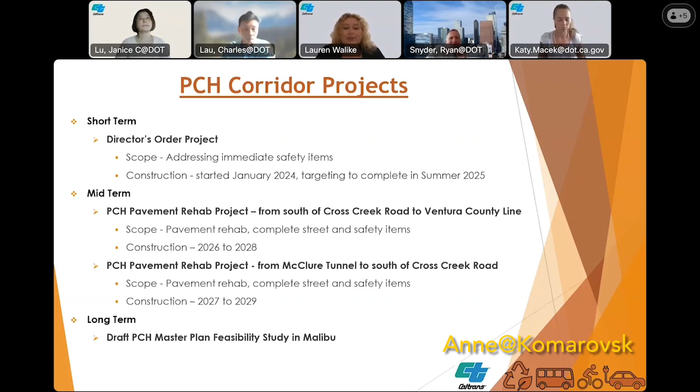You're on mute, Janice. Thank you for letting me know that. Hi, good afternoon, everyone, my name is Janice Lu.

I'm the project manager for these two pavement rehab projects. Along with me, my colleague Refugio, the design manager, will be helping me present the scope of work as well. I'm going to dive right in.

The first project is the north segment. This is about a 16-mile stretch on PCH, going from the south end of Cross Creek Road to the north end at the Ventura County line. Everything is within the city of Malibu.

The main purpose of this project is to fix the roadway. This will extend the service life of the roadway and improve the ride quality, and also minimize maintenance work, which will minimize maintenance worker exposure. We also understand that there's a lot of safety concern on PCH, so we're also incorporating and upgrading complete street features and safety features.

Next, I'm going to hand it over to Refugio to discuss the proposed scope of work. Yes, good afternoon everyone. I'm going to go over the bullet points and the proposed scope of work for this project. The pavement rehabilitation consists of cold plane and overlay with rubberized hot mix asphalt.

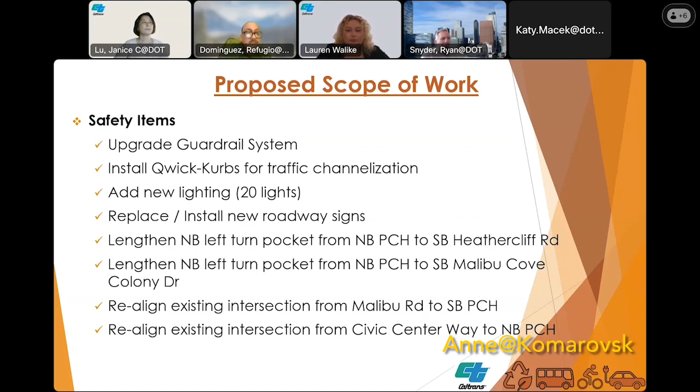Next slide. We have some challenges regarding the bike lane analysis. We would like to have bike lanes, class 2, from beginning to end, continuous.

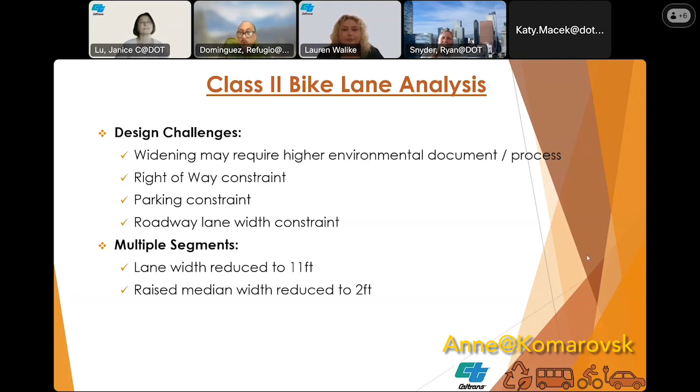Regarding bike lane analysis, where we are putting bike lanes, we'll be reducing the lane width from the typical 12 to 11-foot lanes. And the raised median at particular locations, we'll be reducing from 12-foot to 2-foot median.

And the class 2 bike lane, as we can see on the exhibit, there are 22 segments going southbound, 22 segments going northbound throughout the project limits. Going northbound, there's going to be 7.7 miles of new class 2 bike lane. And coming southbound, 7.1 miles of new class 2 bike lane.

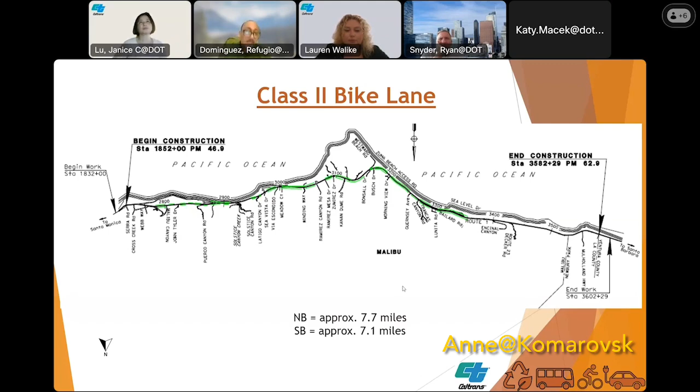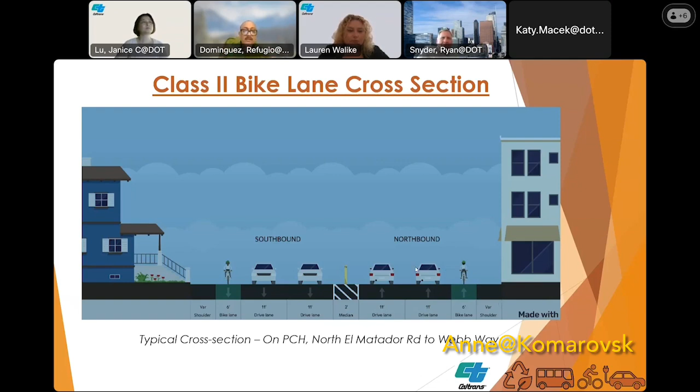Next slide. This is a typical bike lane cross section throughout PCH. From El Matador to Webb Way, which is most of the project limits, there will be a bike lane southbound and one going northbound, next to the existing shoulder. North of El Matador, we will not have bike lanes, only from El Matador to Webb Way.

Next slide. New sidewalks - we will have 6 new sidewalks. There are locations where we have dirt, or it's not really a sidewalk, where we will be adding new sidewalks. One is at Heathercliff, as you can see on the top left.

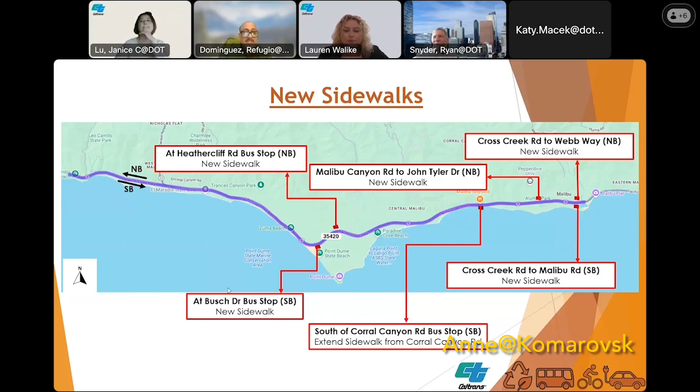There's a bus stop - we're going to be extending the existing sidewalk to a crosswalk so they can go south. Then at Malibu Canyon, between Malibu Canyon Road and John Tyler, then at Cross Creek Road to Webb Way. Then we will look at the southern portion at the bottom of the slide, from Cross Creek Road to Malibu Road going southbound. Then from Corral Canyon to a portion, to a bus stop. And at Busch Drive, there's a bus stop - we are adding also a piece of sidewalk.

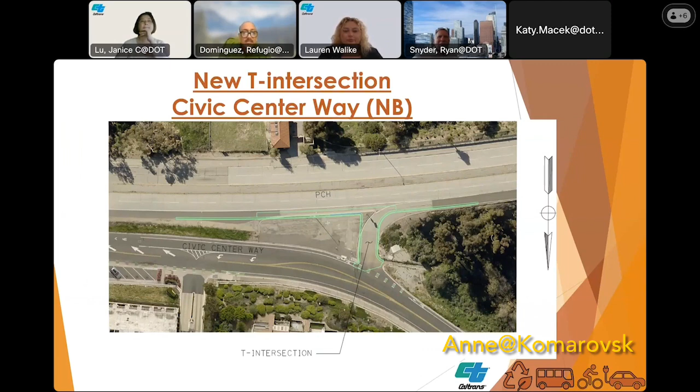Next slide. Regarding the 2 intersections I mentioned before, at Civic Center Way, we're adding a T intersection, 90 degree. This is the location where we're adding the T intersection, going northbound.

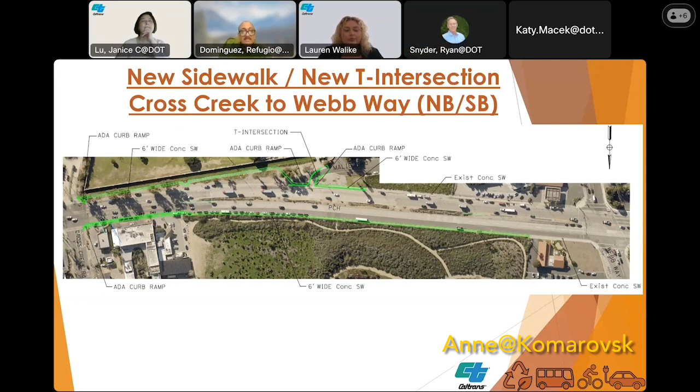Next slide. Coming southbound, a new intersection at Malibu Road - a T intersection, as you can see in green. We're also adding a sidewalk from Cross Creek to the new intersection, as you can see on top of the screen. And looking south from Cross Creek at the bottom, you can see a green line - that's a new sidewalk we're adding from there to Webb Way.

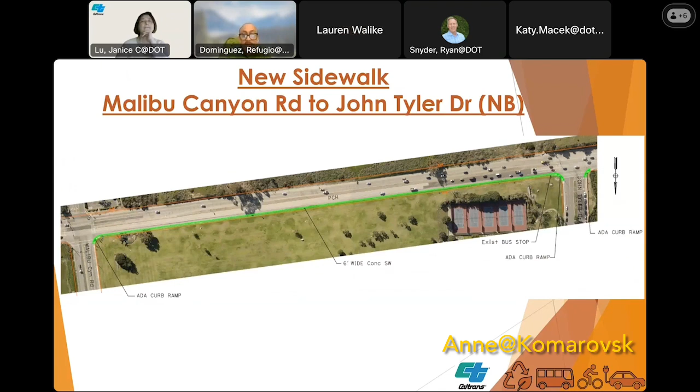Next slide. New continuous sidewalk going northbound between Malibu Canyon Road and John Tyler. I think Pepperdine owns that green area.

Next slide. New sidewalk south of Corral Canyon. This is going southbound from Corral Canyon up to a big stretch - I forgot exactly how many feet, but it's a continuous sidewalk that we will be adding.

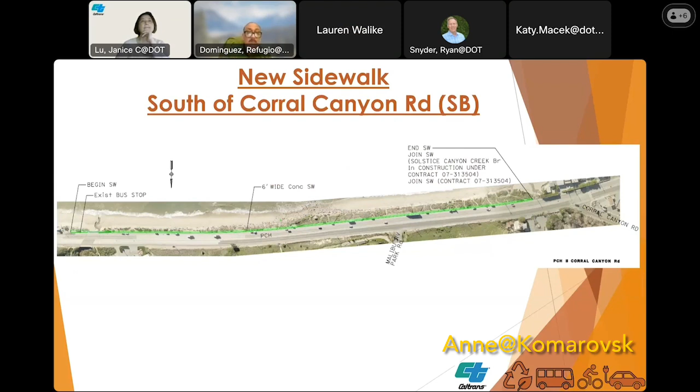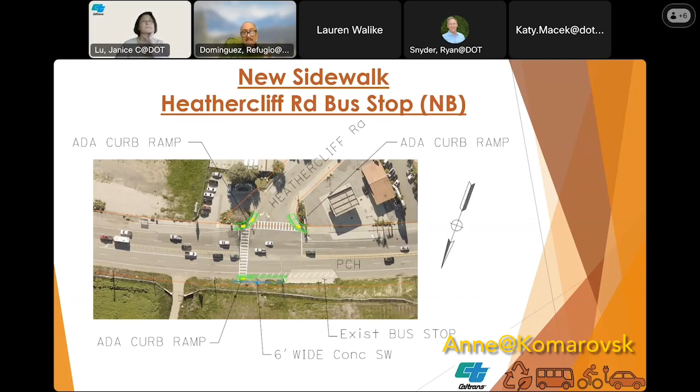Next slide. At Heathercliff, we have a bus stop going northbound. We're going to add a piece of sidewalk so persons can continue with a crosswalk, and then when they reach the light, they can use the crosswalk to cross and go to the other side on Heathercliff.

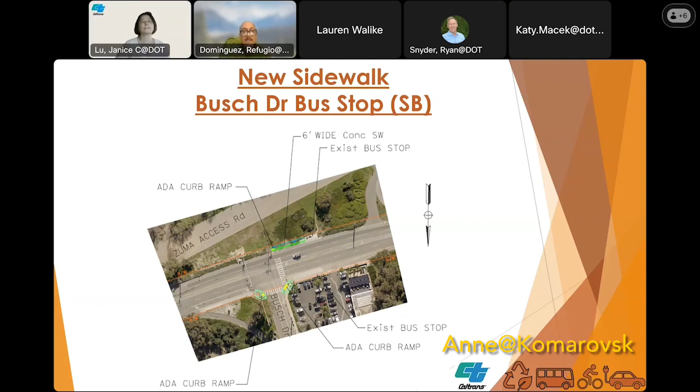Next slide. At Busch Drive, there is a bus stop but no sidewalk - just a little piece. We'll be extending the crosswalk so it's continuous, so the sidewalk will go to the crosswalk and the pedestrian can cross. Next slide.

Thank you, Virgil. So the project schedule, currently we're still in design phase. We're hoping to wrap it up maybe October in fall 2025. Construction will start approximately next year's summer, and hopefully we can finish it by summer or fall 2028. We understand there will be Olympics 2028, so we'll have a spec for no work during the summer months from June 1st to September 1st. At that time there will be no work or closure during that time.

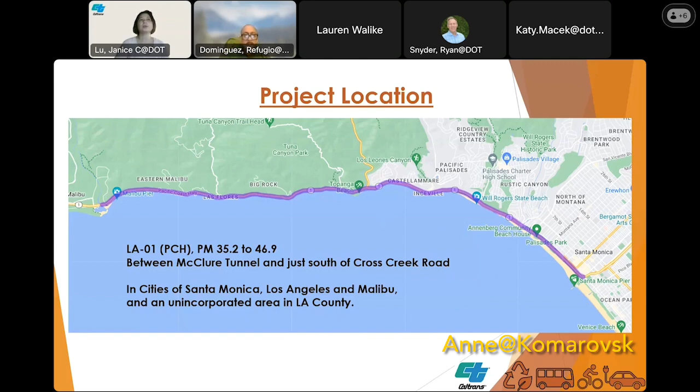I'm going to dive right into the south segment of the project. Project location for this one is about an 11.7 mile stretch on PCH, covering 4 cities. Starting from the south end, it goes from Santa Monica, then to the city of Los Angeles, then to the unincorporated area in Topanga, and finally to the city of Malibu. Post miles about 35.2 to 46.9, again from McClure Tunnel to Cross Creek Road.

Similar to the other project, the purpose of this project is to fix the roadway, extend the service life of the roadway, improve the ride quality, and minimize maintenance work and worker exposure. We'll also upgrade the complete street features and safety features.

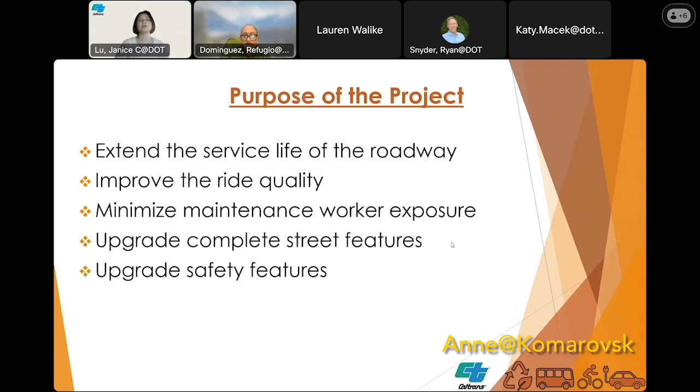I'm going to hand it back to you, Virgil. Yes, like Janice mentioned, the scope of this project is similar to the other project on the north side, but I'll go over the key points, which is cold plane and overlay with rubberized hot mixed asphalt. We're going to replace the structural section.

There are many locations where the pavement needs to be replaced, not just an overlay but replace the whole pavement at certain specific locations. We'll be doing that especially now that due to the fires, there's a lot of trucks doing improvements, doing excavation, hauling dirt from left to right, and the pavement is getting damaged. So for this project, we'll be replacing structural sections at those specific locations.

Also, there are 30 bus pads where we'll be replacing the pavement from asphalt to concrete, which lasts longer. Regarding complete street elements, we'll be upgrading 22 ADA curb ramps, adding 2 new sidewalks, 2 new crosswalks, and enhancing all the existing crosswalks. Since we're doing an overlay, everything will be restriped, brand new. And similar to the other project, we'll have pedestrian signals, countdown pedestrian signal heads, and bicycle detection.

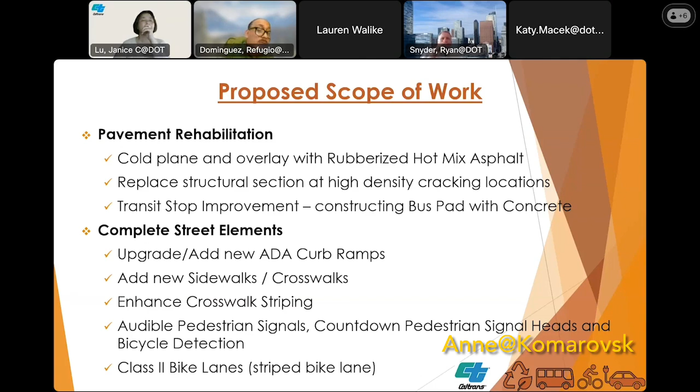And regarding the other project, we're also going to be adding class 2 bike lanes within the limits of this project.

Regarding safety items, we'll be upgrading the guardrail system. We'll also be installing Qwick-Kurbs for traffic channelization in the median. We'll be upgrading lighting at the 2 tunnels that we have, Roosevelt Tunnel and Beach Tunnel inside lighting.

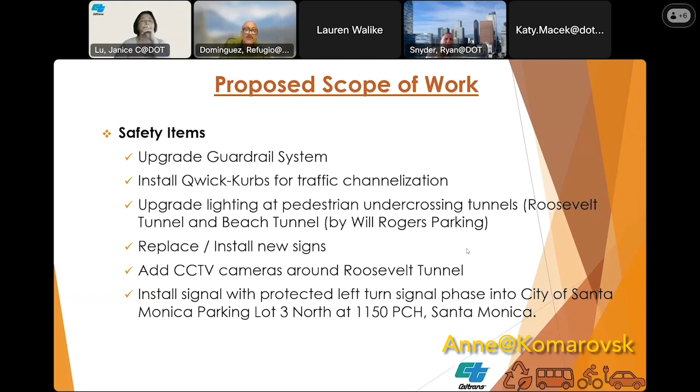We'll be replacing and installing new signs throughout the project limits, and we'll be adding CCTV cameras for safety around the Roosevelt Tunnel. Also, we're going to be installing a new signal with its own left turn phase, going northbound on PCH to lot Santa Monica parking lot 3 north, which is on the beach side. The address is 1150 PCH.

Next slide, new bike lanes. For this project, due to existing constraints, we will have 5 new lane segments going northbound, as you can see on the exhibit, near from Temescal Canyon to Bay Club going northbound. There used to be 6, but we dropped one due to consistent landslides that keep falling into the shoulder, which is a continuous problem. So as of now, that bike lane has been removed due to safety reasons.

Going northbound, at the end from Carbon Canyon to Sierra Road, we have a stretch of 1.8 miles proposed as a new bike lane. Coming southbound, there are 4 segments: from Carbon Canyon to Sierra Road; then, as shown on the exhibit, a 1/3 mile segment between Big Rock and Las Flores Canyon; another segment close to Peña Road, which is 1/4 of a mile; and finally, from Bay Club Drive to Driftwood Drive, a half mile stretch of new bike lane.

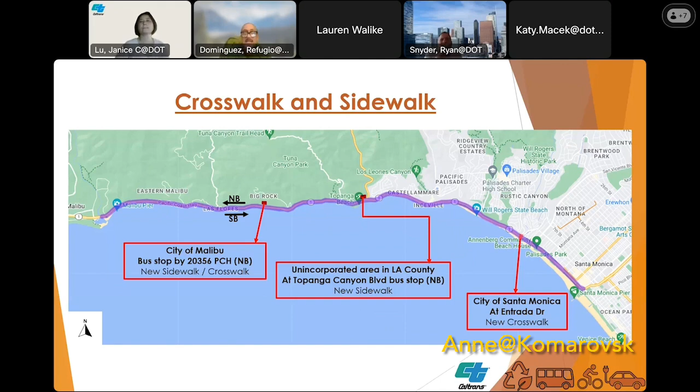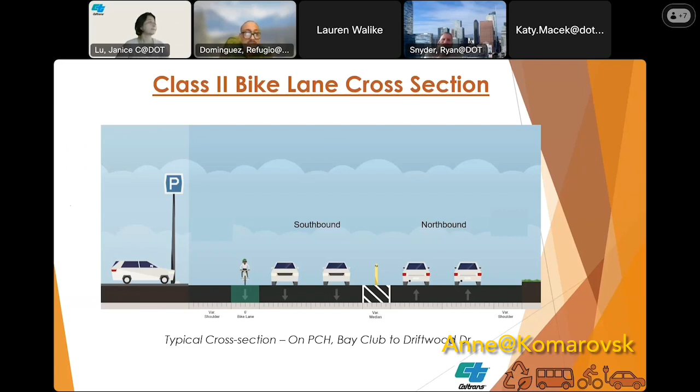This is a typical class 2 bike lane cross section on PCH from Bay Club to Driftwood Drive. Within this stretch, we're proposing a bike lane only on the southbound side, close to the beach. The northbound side used to have one, but due to the landslide and safety concerns, we removed it from this project as of now.

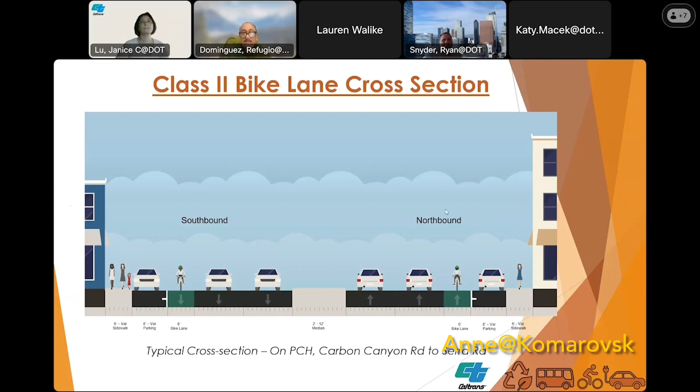This is the new sidewalk and crosswalk at 20356 PCH. There's a bus stop, but there's no sidewalk, just a dirt path. We'll be adding a sidewalk, and at a certain point a crosswalk so pedestrians can cross to the south side of PCH.

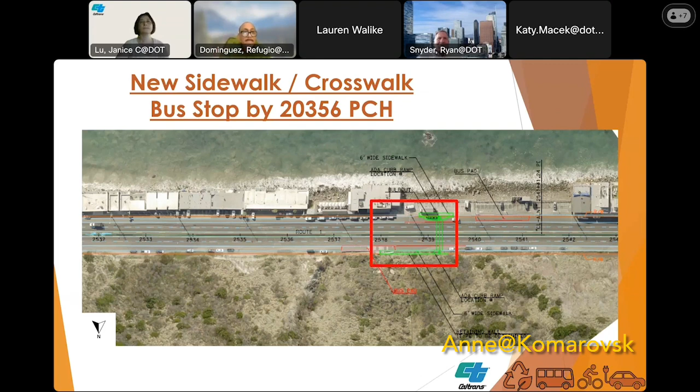This is the new sidewalk at the northeast corner of Topanga Canyon. There is a bus stop, but it's just a dirt path, so we'll be adding a new sidewalk.

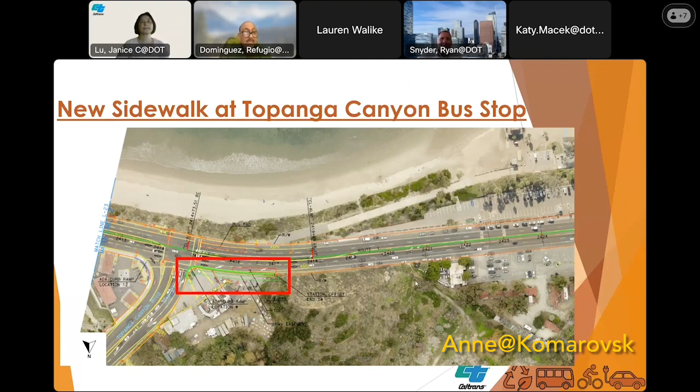This is the new crosswalk just south of Entrada Drive and Pacific Coast Highway at the intersection. It's a new crosswalk that we're adding for safety reasons.

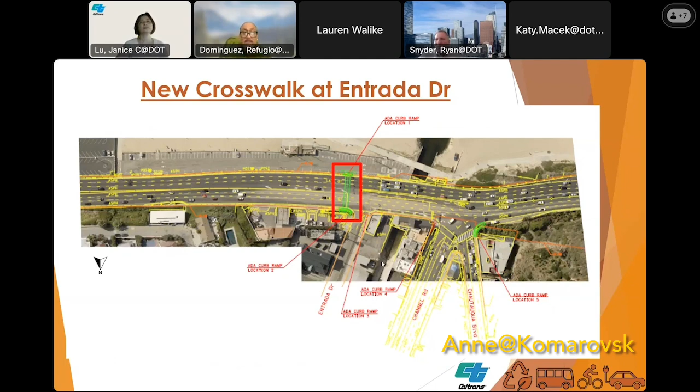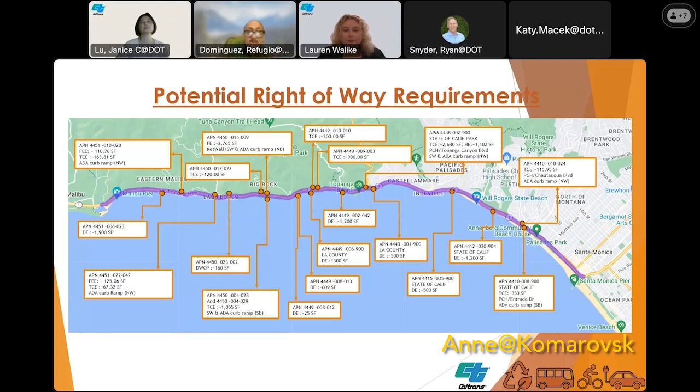For this project, we're currently in the project approval and environmental document phase, which we're hoping to wrap up in a month or so. This phase will finalize the scope of the project and complete the environmental document. After that, we'll start design, hoping to finish by end of 2026. Construction is estimated to start the following summer, 2027, running to sometime in 2029.

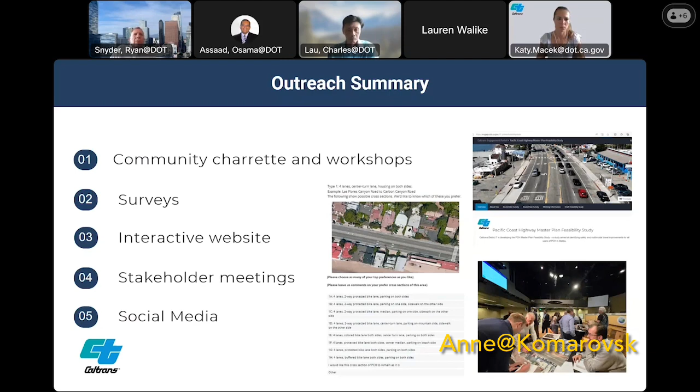We have done pretty extensive outreach. We started back in the summer last year with a community charrette and various workshops. We did two rounds of surveys, we have our interactive website, we've had stakeholder meetings with individuals and different stakeholder groups, and we've been posting on social media as well.

One of the most important things I want to highlight is that we've tried to apply a toolbox. We came in here with the charge of making PCH in Malibu safer. Historically, it has not lived up to what we would like it to be. The community has been very clearly asking us to do something safer, and so we're trying to do all of these things that we can to make it safer.

I also want to point out a number of things from the community engagement we've done. We asked in our surveys: what about just leaving the highway as it is? That option came in dead last every time we asked that question - so people want change. I also want to stress that we have limited right of way.

To add something, we have to give up something. So that's the challenge: trying to balance all of the different goals of making things safer, improving access for people walking, bicycling and using public transit, and making it a nicer community that fits in with the context. There are a lot of trade-offs, with pressure from one group asking us to do this, and another group wanting the exact opposite. We've had to balance as best we can.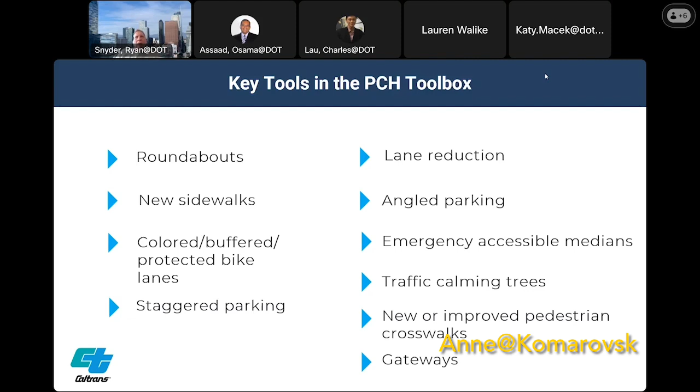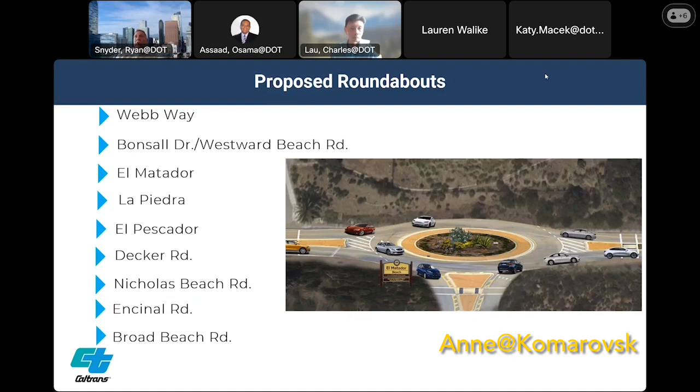These are the 9 locations where we're planning roundabouts. Webb Way is the only multi-lane roundabout in this group, and it's also an opportunity to create a gateway into the center of Malibu. At the other locations, we're looking at proposed roundabouts, especially at T intersections where somebody is pulling out from the side onto a busy highway and turning. We believe these will go a long way in improving safety there.

We have proposed some sidewalks, and some of these do overlap with what you just saw in the previous presentation. These are required by Senate Bill 960, which says we have to provide sidewalks and bicycle facilities on state highways. From Las Flores to Carbon Canyon Road is a place where we're planning to add sidewalks where none exist. A little further north, sidewalks do exist, but there are spot locations where a tree, mailbox, or something else is blocking the sidewalk, and we need to remedy that.

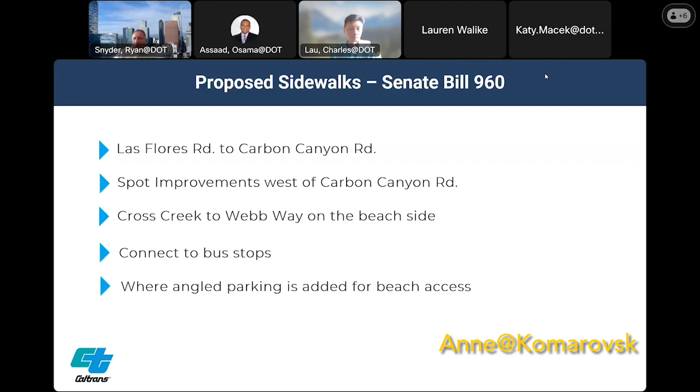We're adding sidewalks from Cross Creek to Webb Way on the beach side, connecting to bus stops - that's where a lot of the overlap with the previous presentation exists. We'll also add angled parking for improving beach access, which we'll see more about later, and where we do that, we'll add sidewalks so people have a better way of walking to their next destination.

These areas in blue are where we are proposing to add sidewalks: again, Las Flores to Carbon Canyon, Cross Creek to Webb Way, at John Tyler Drive where there's a bus stop, and at Kanan Dume where there's also a bus stop. These other 4 locations at the north end are where we're looking at providing angled parking and adding sidewalks.

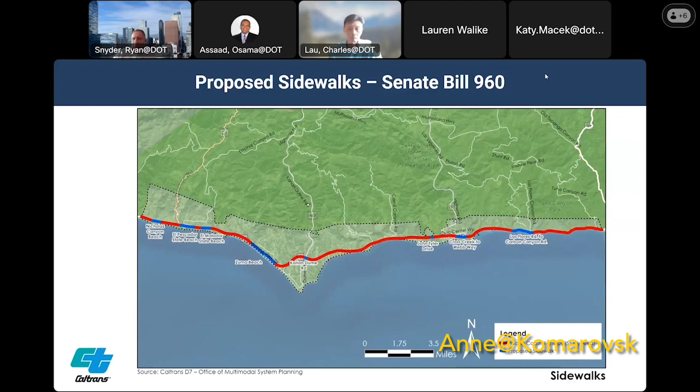We're also adding buffered, colored, and/or physically protected bike lanes throughout pretty much the entire route. We have the option to provide both along the entire route. This is another one of those areas where a large group of people told us they only want protected bike lanes and nothing else is acceptable, while another constituency group told us they would definitely oppose any bike lanes with physical protection. So we're leaving that option open.

The one area between Las Flores and the pier will have a buffered, colored bike lane rather than a protected one. The reason is all the on-street parking there next to driveways - sight visibility is not good. There are homes that come right up to the highway with structures, shrubbery and trees, and people coming out of those driveways couldn't see a bicycle. The on-street parking creates more visibility issues, so we believe the best option there is just a striped and physically buffered painted bike lane.

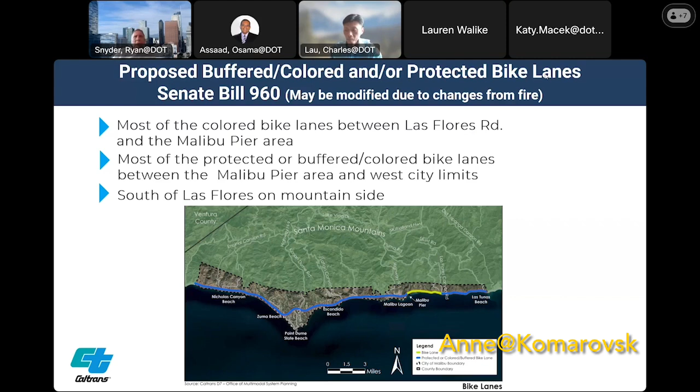We're proposing staggered parking where it makes sense. In the west end, there are places where we've removed parking on one side, for three reasons: first, to eliminate people parking on the mountainside and running across the road; second, to eliminate people parking on one side and walking along a very narrow strip along the highway; and third, we need to make space for continuous bike lanes.

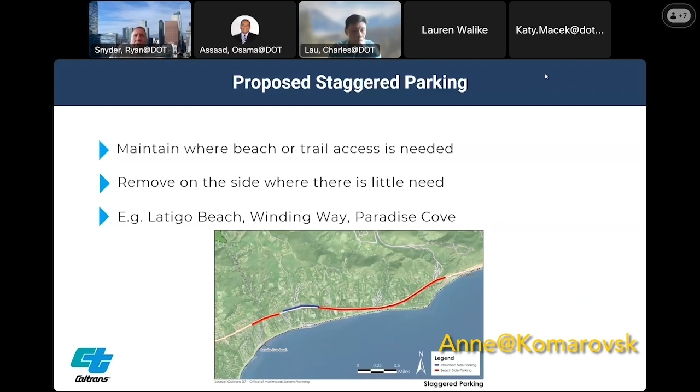For the most part we've preserved parking on the beach side and eliminated it on the mountain side. The one exception is near Winding Way, where the trailhead for Escondido Falls exists - there we preserved parking on the mountain side, since it's a greater distance to walk to the beach where demand would be greater, while not permitting parking on the beach side. Then as we get closer to Paradise Cove, we swap that back to the beach side.

Once we get west of Trancas Canyon, we're looking at reducing the number of travel lanes to 2, or maybe 2 with some passing lanes staggered. This gives us the opportunity to add reverse-in angled parking near some key beaches: El Matador, La Piedra, El Pescador, Nicholas beaches.

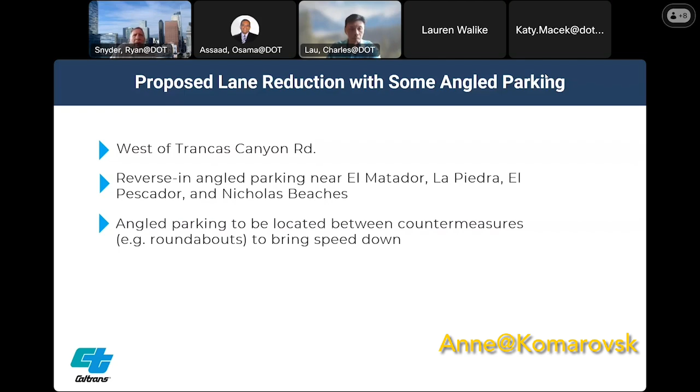Also looking at angled parking near Webb Way to improve access. There are places where we've eliminated parking, but in order to replace what we lost, this reverse angled parking will give us an opportunity to replace some of that parking. Actually, we're adding more parking than we were removing.

At the new or improved pedestrian crosswalks, some places we're just improving the crosswalk, other places we're adding new crosswalks. We're looking at the area especially between the pier and Las Flores. Those crossings are difficult, and we need to make that area safer.

We want to slow the cars down there. We would love to lower the speed limit, but state law prevents us from just posting another sign that we like. So we're looking at different techniques to try to slow the cars down.

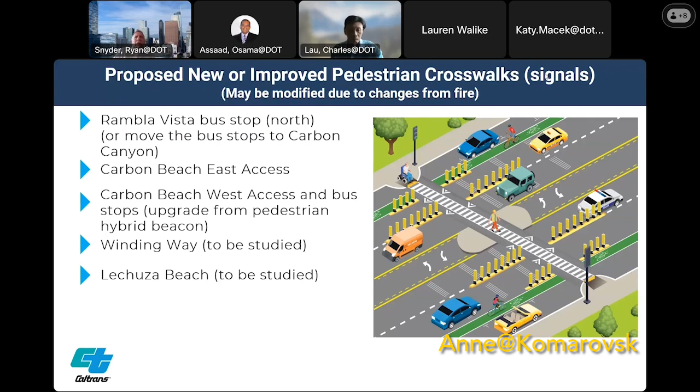Some of the new improved crosswalks we're looking at are at the Rambla Vista bus stop on the north side, or that bus stop might move to Carbon Canyon. We're looking at Carbon Beach East access - there's a beach access there that needs a good crossing. Carbon Beach West access, where there are bus stops, we're going to upgrade from the pedestrian hybrid beacon to a full signal, and also studying new crosswalks at Winding Way and Lechuza Beach.

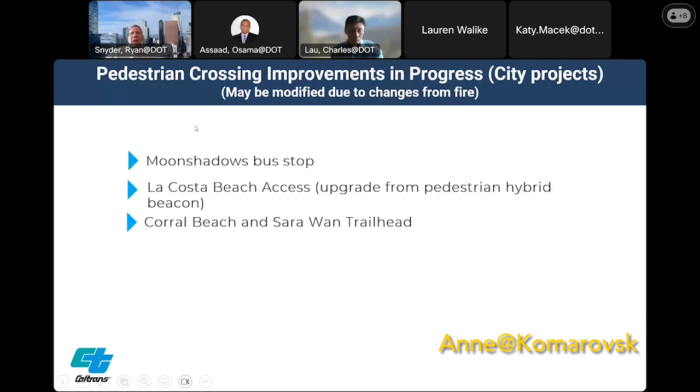Now, these are some of the other crosswalks the city is already working on: the Moonshadows bus stop, La Costa Beach access - again upgrading from pedestrian - and Corral Beach and Sara Wan Trailhead. Those are some other places we're looking to improve the crossing. This map shows where some of those pedestrian crossing improvements exist.

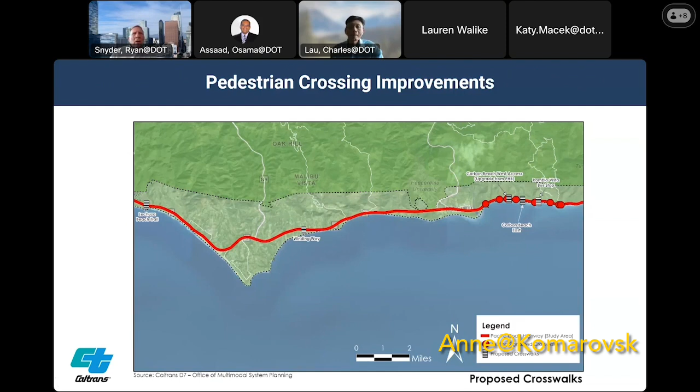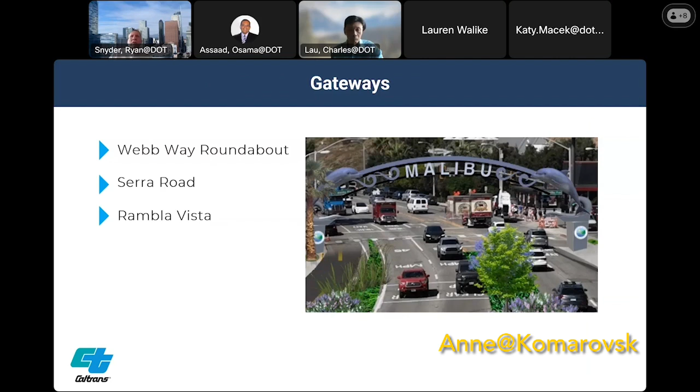Also looking at gateways - this was something that was quite popular. There are 3 possible locations for that. Again, I mentioned the Webb Way roundabout, one perhaps at Serra Road, and perhaps coming from the south at Rambla Vista. Gateways signal to the motorist that you're entering a new context and need to respect that context, so hopefully we can help slow the vehicles down. Also an opportunity to incorporate some public art, make the gateway artistic.

Now I want to show some of the cross sections. I have all of the cross sections in here, but in the interest of time, I will show some of the cross sections we're looking at. Again, there are alternatives for many of these locations.

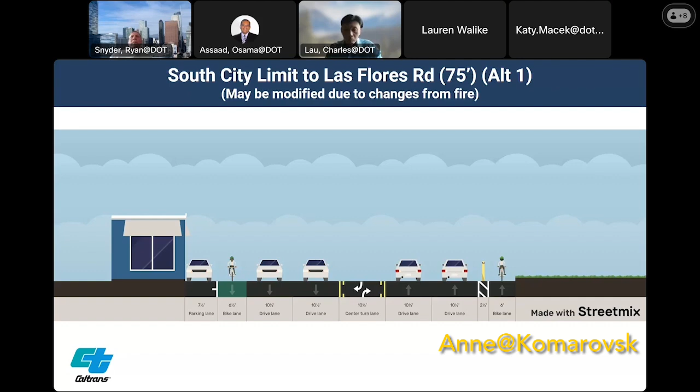This is the South City limit to Las Flores Road. This is our first alternative, where it's 75 feet wide. Again, all of these things may change due to anything that happened with the fire. At this location, we would have separated bike lanes for this alternative on the mountain side, and on the beach side, a striped and colored bike lane. We can't have separated bike lanes on the beach side because that would block off people's access to parking at their homes, but on the mountain side, that's a possibility.

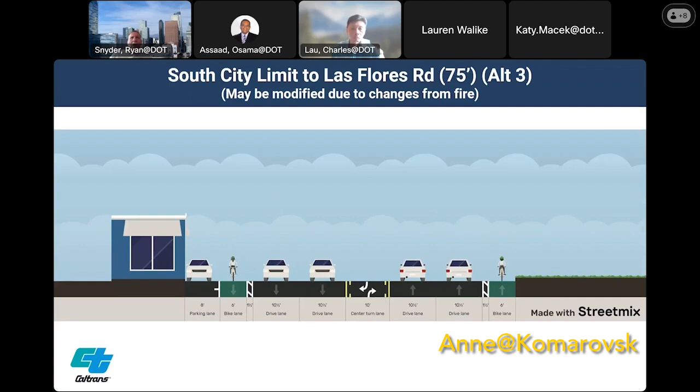Another option would be at that same location to have 2-way separated bike lanes on the mountain side. Or a third option would be to have the colored and buffered, painted buffer bike lane on both sides.

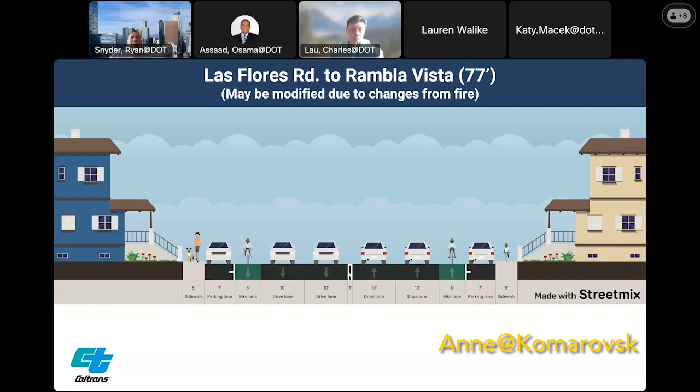Las Flores Road to Rambla Vista, we're very constrained here - it's only 77 feet wide. We don't have a lot of space to do what we need to do. We do need to add sidewalks, we do need to add bike lanes, and so here we're proposing to take out the center turn lane to create the needed space.

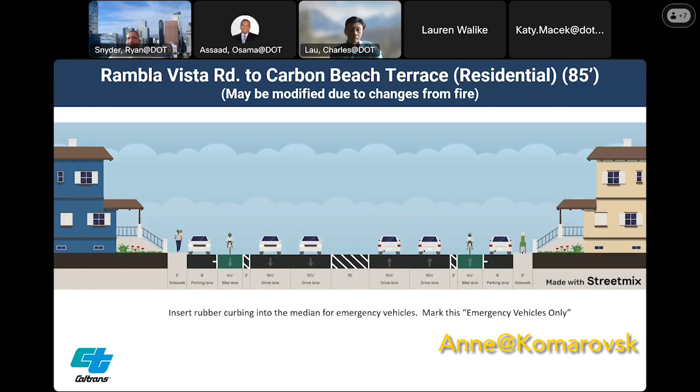Carbon Beach Terrace to Serra Road, there are different options, and this is the center part of the city. This is where we had a lot of people tell us that they would like to modify the character to make this more like a main street, to make this more like a boulevard. So we've got 3 different options for this. I want to stress that all of these options involve trade-offs. There's things that we add that people like, and there are things that we take off that others don't want.

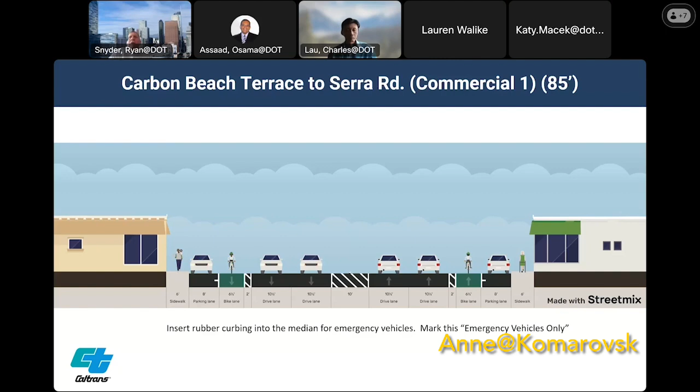Here on this one, this is the simplest option, adding the colored buffered bike lanes. Option 2 really goes further to make this more of a main street boulevard. We're substituting planted landscaped islands in the middle for the turn lanes, and having the bike lanes on the side. This is the second option here.

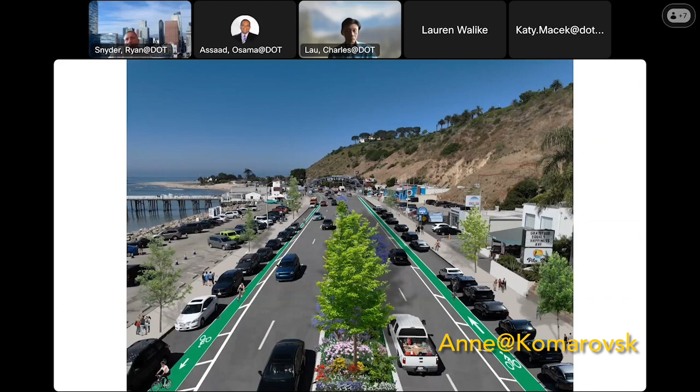Again, trade-offs, it looks nice. It does help to slow the vehicles down. It does create a better environment. The trade-off is that the center turn lanes are gone, at least in some areas. The islands could be staggered, but emergency access would be compromised in this particular area. That's part of the trade-off.

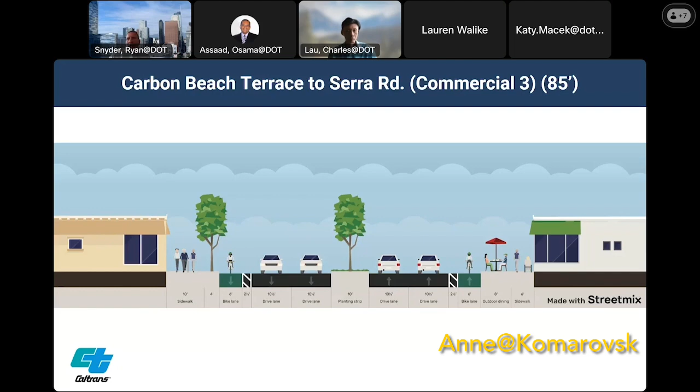Another option would be to eliminate parking on street in this area and widen the sidewalks even further. Add outdoor dining space, add more landscaping, and this is the option that does the most for creating a nice atmosphere, a boulevard, Main Street environment. But the trade-off is that the parking is gone. So options for people to consider with pros and cons with all of these.

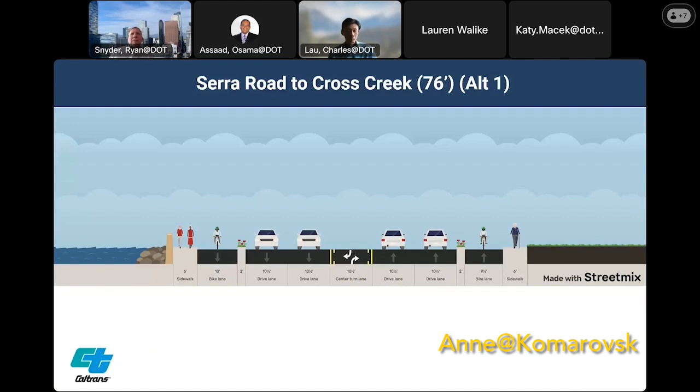Moving further north, Serra Road to Cross Creek. One option is the separated bike lanes with the physical barrier. Another is without the physical barrier, but colored and painted buffer bike lanes in there.

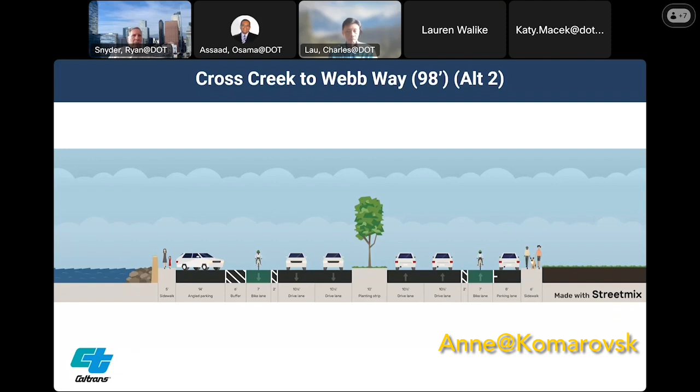Cross Creek to Webb Way. This is an area where it's pretty wide here, and we're looking at adding the angled parking, so there's improved beach access, adding that on the beach side. And these are physically separated lanes for one option. The second option replaces the physically separated bike lanes with just the colored and buffered bike lanes. But we're adding a sidewalk on the beach side in both cases.

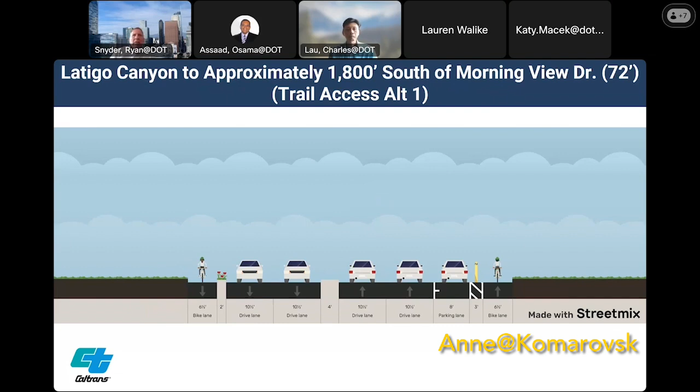Now Latigo Canyon, this is essentially up to Zuma Beach Road, or up to Zuma Beach. One option is the physically separated bike lanes. Another option is the colored buffered bike lanes. I want to stress that in this area, we are removing parking on one side. I want to go back here. We are removing parking on one side. We're leaving the parking on the beach side.

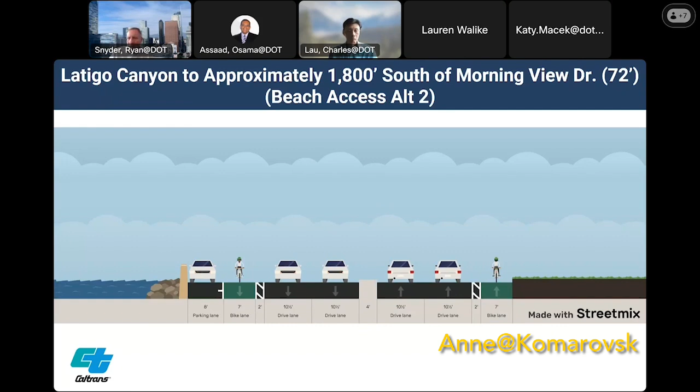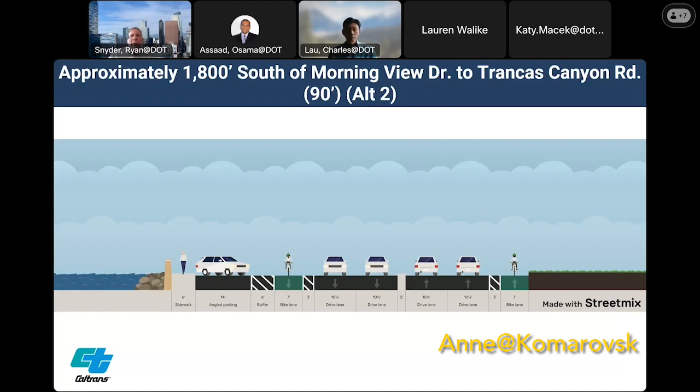Now this is the Zuma Beach area. There's some more space to work with here. This is with angled parking. We're increasing the number of parking spaces. This option here would add physically separated bike lanes and a sidewalk along with the angled parking. This other option would add the angled parking and the sidewalk, but have colored buffered bike lanes instead of the physically separated bike lanes. And then El Matador to the city, north city limits.

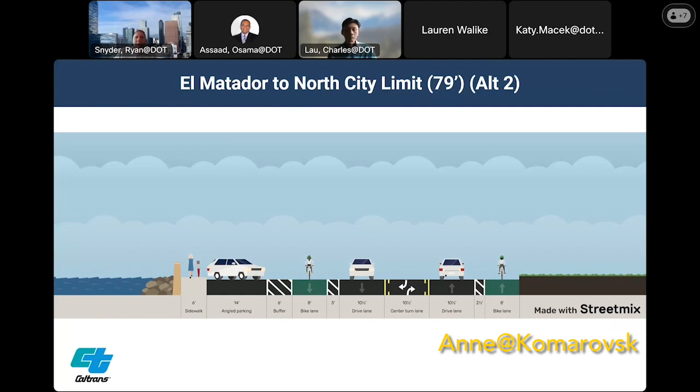Again, this is that area where north of Trancas, we're looking at bringing this down to one lane in each direction, or a lane plus some passing lanes. But here's an opportunity to, the extra space gives us an opportunity to add the angled parking, add the sidewalk on that side, physically separated bike lanes, or same thing with the colored buffered bike lanes.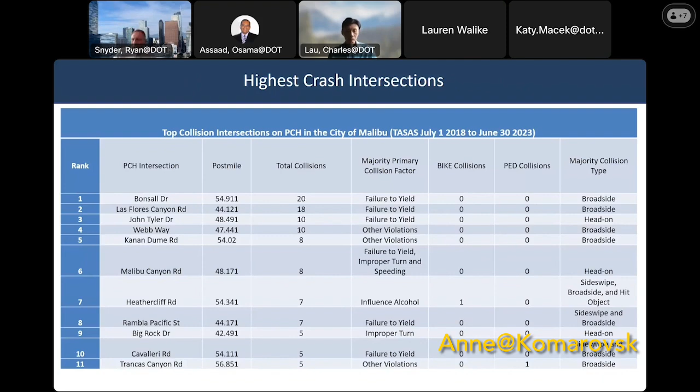Now, those are the linear improvements that we looked at. We also looked at intersection improvements at the intersections, the top 11 intersections that had the most collisions that we looked at. And at each one of these, we're proposing intersection improvements. I'll show you some of the main ones here.

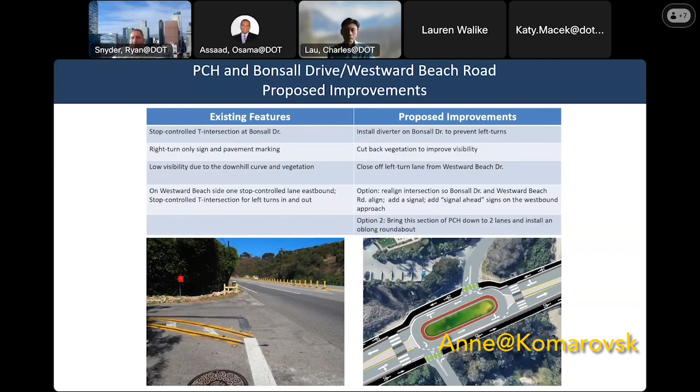This one is at PCH and Westward. So one option is to straighten out that intersection coming out there from the north side, the mountainside. Another option is to create a roundabout. Roundabouts don't have to be round, but this option here would change the character of that intersection, and it would eliminate a lot of the conflicts. So there's different things we're looking at for those intersections.

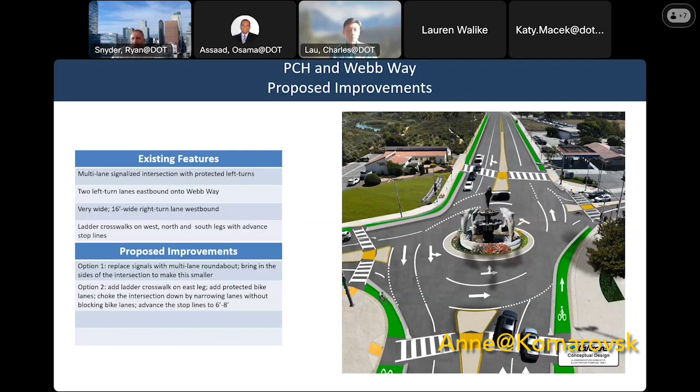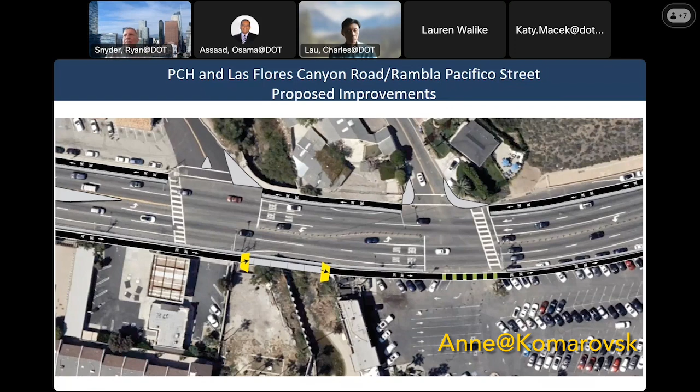And this is a complex intersection here at Rambla Pacifico and Las Flores. We're proposing a lot of changes to these intersections, with extensions of the curbs here. We want to slow the vehicles down. We're looking at new sidewalk over here, especially over the bridge, and I know there are other projects going on at this bridge. Physically separated bike lanes here are a possibility. Median extension here, islands over here, just to slow the cars down, to create a feeling of narrowness and try to tame that intersection down a bit.

So other things that we're looking at, and this may be perceived as more futuristic, but these things are coming pretty quickly. Vehicle to everything communication equipment can really help us do a lot that we can't do otherwise. Our toolbox is limited. We're trying to accomplish a lot of things with a very limited toolbox, but we're adding things to this tool with this communication.

The city has gotten permission and state law passed to allow speed enforcement with cameras. So that's starting—cameras that communicate in real time with the sheriff. So if there's somebody going 80 miles an hour, the sheriff can be notified quickly.

Today's technology will allow for communications to warn of safety hazards, but one of the things we'll need is for motorists to also have the transponders, the transceivers, so the communication goes both ways. Emergency vehicles will be able to communicate to drivers that they need to get through.

And in the long run, communications to drivers when they are speeding, and even to the extent of modifying the speed that vehicles are able to go. The city is right now considering modifying all signals to a safety adoption system.

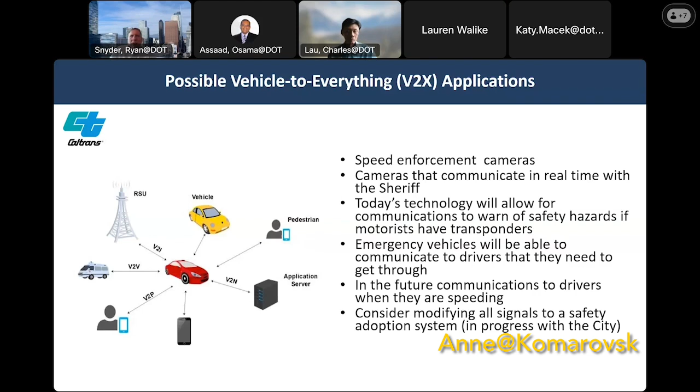So a table with the parking analysis—as I mentioned, we're proposing the possibility of removing parking on one side of the highway, and you'll see the on-road spaces lost there. Between the east city limit and the west city limit, that comes to about 1,375 spaces. But we've gained about 2,275 spaces with the angled parking, so there's a net gain of 900 parking spaces.

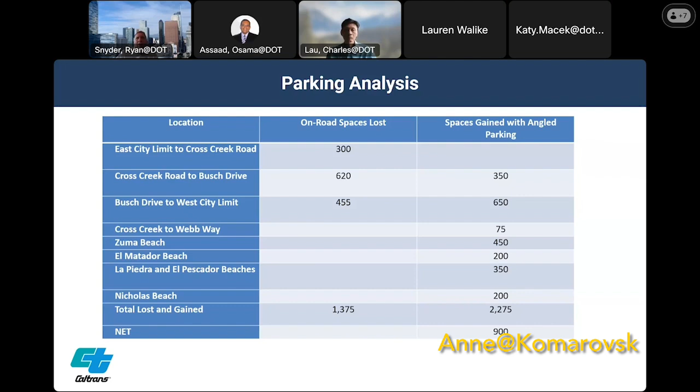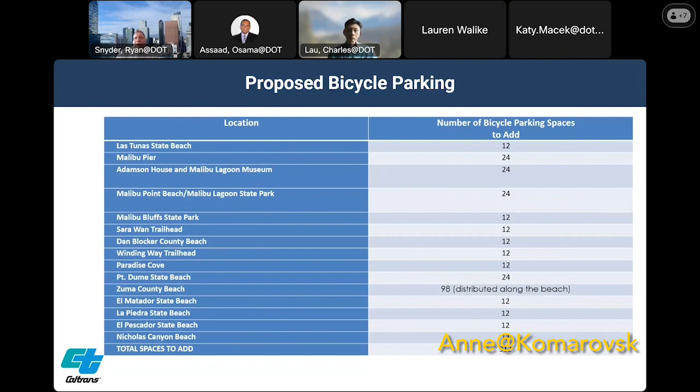And we're proposing to add some 300 bicycle parking spaces. With the bike lanes, more people will bicycle, and it'll make it safer and more possible for people to bicycle. And if they've got a good place to park, we can actually add some more capacity that way.

Now we've got some very broad planning-level cost estimates here. At the low end, we're looking at 62 million for all of the improvements, again depending on what gets decided upon. And at the high end, about 268 million.

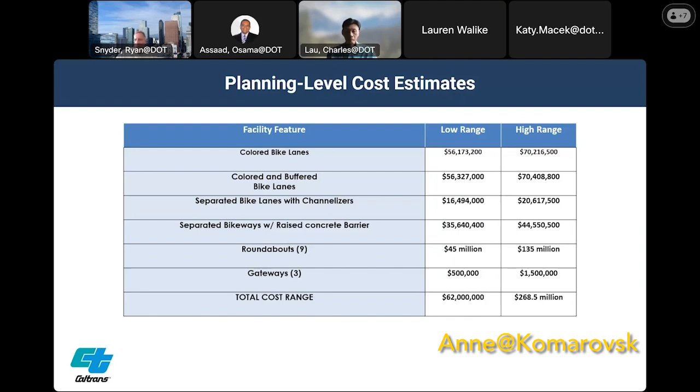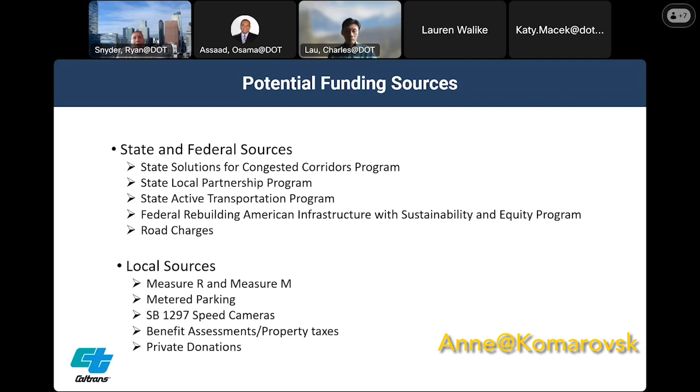And then we've identified some potential funding sources. There are state and federal sources we could look at, and there are local sources we could look at as well. And I want to point out that the timing on this, which we're going to talk about next, depends on when the funding can come in.

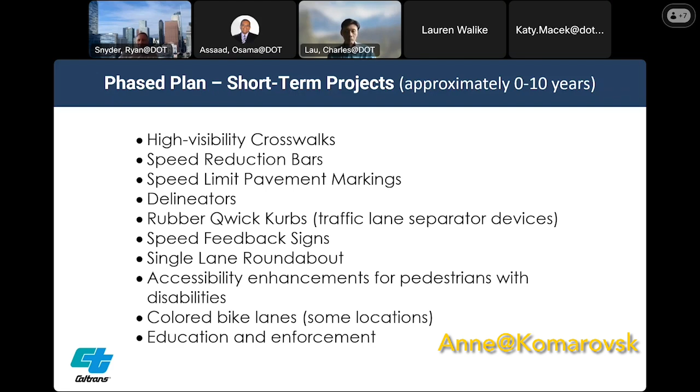The short-term projects, we're looking at maybe the next 10 years or so—a lot of the striping, the speed reduction bars, speed limits, Qwick Kurbs, things that can be put in quickly, some single-lane roundabouts, some colored bike lanes.

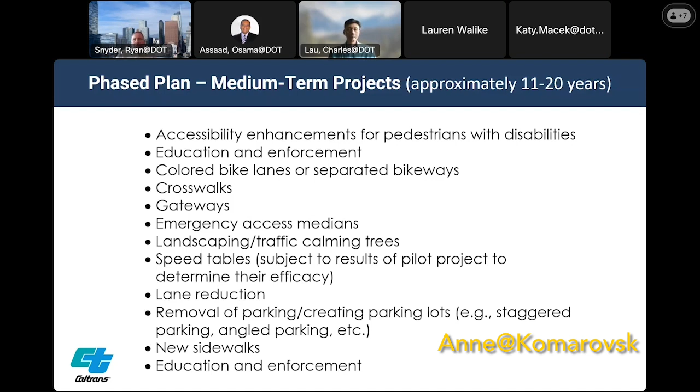Medium-term projects could be in the 10 to 20, 11 to 20 year time frame: accessibility enhancements, more colored bike lanes or separated bike lanes, crosswalks, gateways, some of the things in this list, speed tables—things that involve more physical modifications, more concrete.

And then the long term, we're looking at up to 30 years or so: a multi-lane roundabout at Webb Way, lane reduction on the north end. We had talked about the possibility of putting in a shuttle system with parking lots along the way, and an option in the plan called the National Park-like option, which would actually remove a lane of traffic and make it a bus lane, with lots of shuttle buses running and parking lots to connect to those. That would take a longer time, primarily to find the funding.

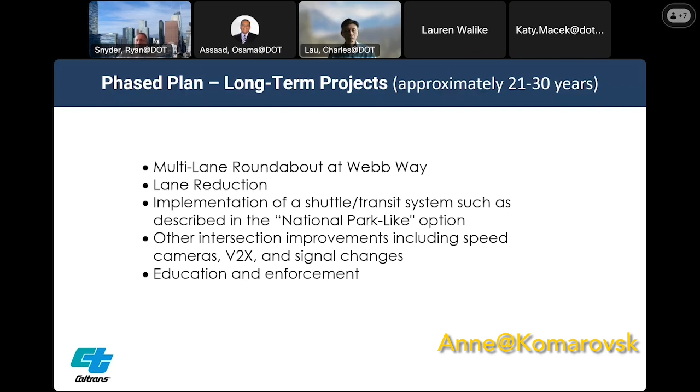Other intersection improvements, including speed cameras, V2X, and signal changes. So that concludes the presentation.